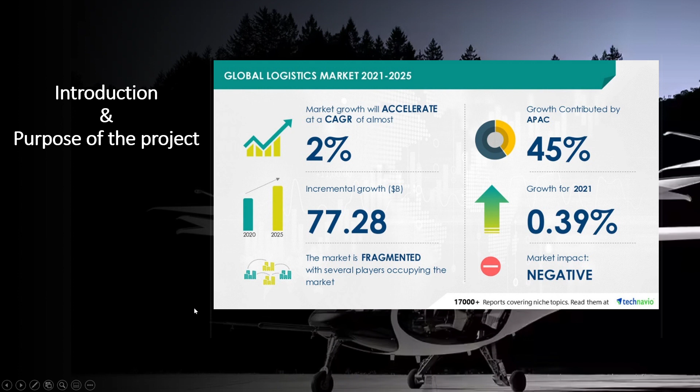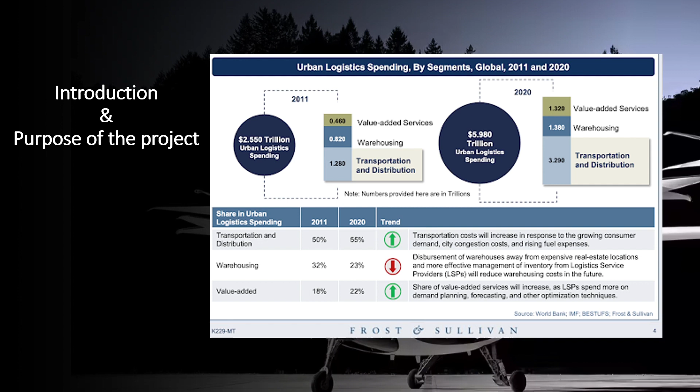The second reason why I chose this project is that Uber's ecosystem already has an advantage for developing this project. It has a good brand image with available shipping service. In addition to the high density of Vertiport networks available, this project will expand the company's service ecosystem as well as make the most of available resources to be profitable for a long time in the future. So the need for fast urban delivery for Uber is clear.

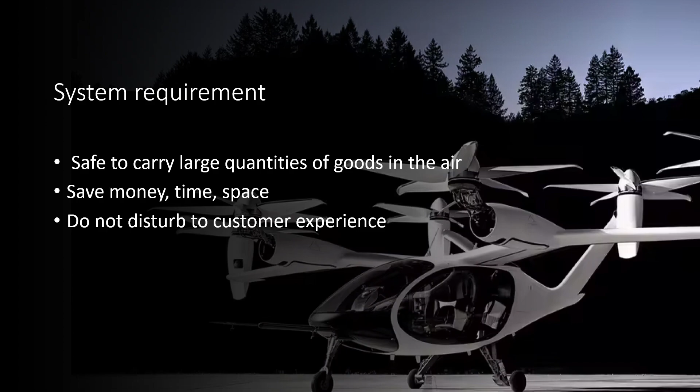I will move on to the system requirements. Like other shipping industry products, safety and low cost are the minimum requirements. It also needs to be able to hold the payload of the package. In addition, a fundamental element for this project is that goods transportation is by aircraft and the Vertiport is built on top of tall buildings. Therefore, an important requirement is that the system needs to save a lot of time and space, as well as avoid disturbing customers. Next, I'll talk about the design.

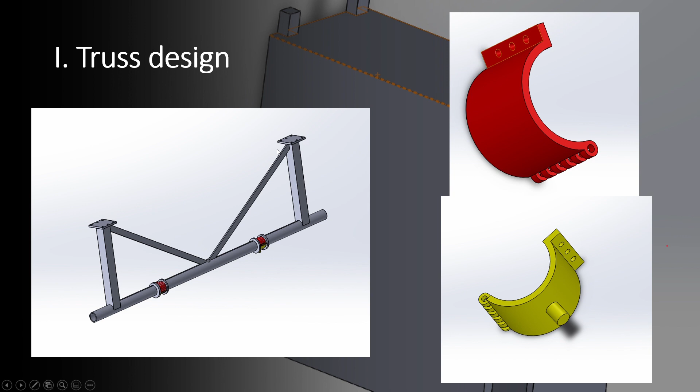As the requirements are clear, I will talk about the design of the truss system and a cargo box. The truss system has two parts, the front part and the back part. What you look at right here is the back part. We can link the truss into the belly of the aircraft by screw and drive. And this part right here is a representation of a hook, which we'll use to link into the cargo box, which I will present later.

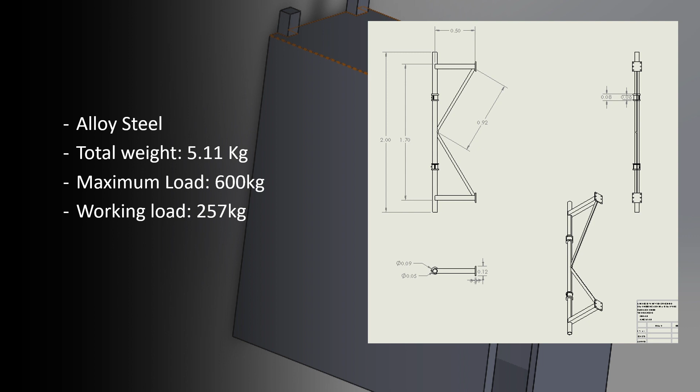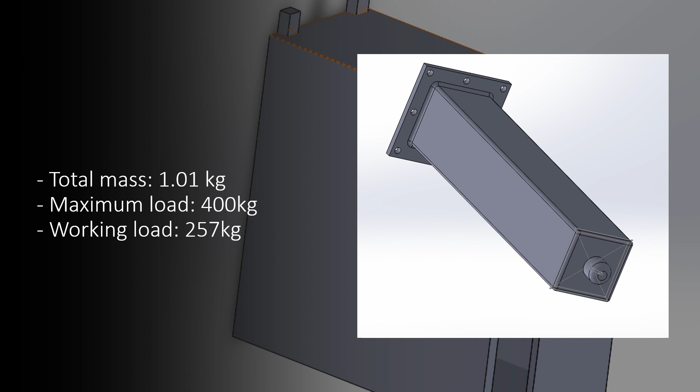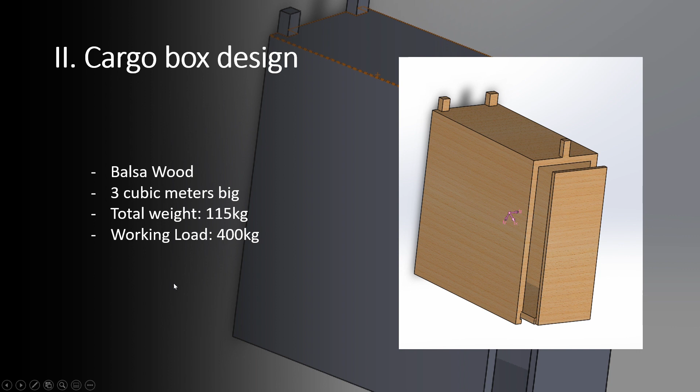In summary, the total weight of the box and the truss system is 121 kilograms. It can carry about 400 kilograms of products inside the box, and the truss itself costs about $3, including the material and the manufacturing. The wood box also costs about $100.

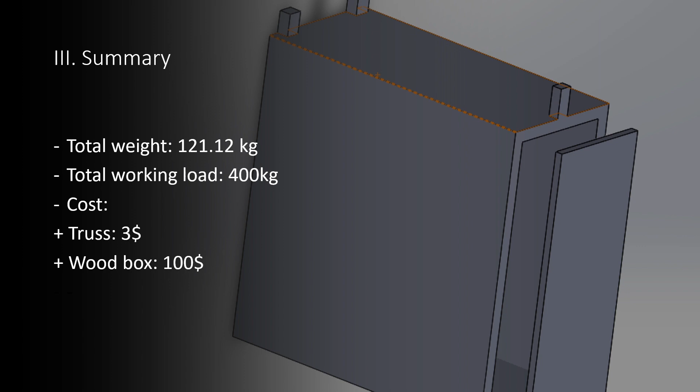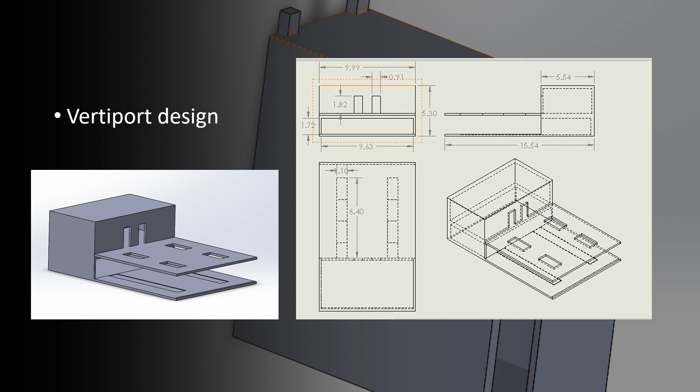This right here is the Vertiport design. The Vertiport has 2 floors. The upper floor is the floor for aircraft preparations and for passengers to board. There are holes between the 2 floors so that when the aircraft is landing vertically, the package can pass through the holes into the lower floor. The lower floor will have a box rack for unloading packages. This vertical system not only saves time and space, but also takes advantage of the condition of high-rise buildings.

Next is the operation cycle. The cycle begins when the aircraft starts to land vertically, while the box under the aircraft, loaded with 400 kilograms of products, is passing through the holes. When the aircraft wheel hits the ground, the box is supported by the supporting table.

The support table will slide the bottom of the box out along with the goods in the box, and then automatically drive into the warehouse, where there are staff ready to unpack and load new items onto the supporting table, and the table automatically returns the new items into the box.

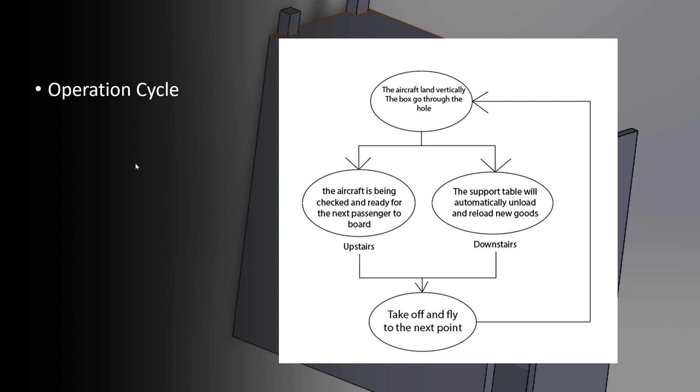Meanwhile, upstairs, the aircraft is being checked and ready for new passengers to board. The aircraft takes off carrying passengers and cargo to the next point, where a new cycle begins.

Here I have done some quick evaluations of the system. This is a small comparison between the truss and cargo box system and the normal van. The truss and cargo box system has a loading ability of 400 kilograms and 3 cubic meters, while the normal van can carry about 650 kilograms along with 5.5 cubic meters.

The travel time from Marina to downtown, calculated by the Uber company themselves, is about 15 minutes with the aircraft and 1 hour 40 minutes with a normal car. And finally, the loading time is my conjecture.

The truss and cargo box needs about 30 minutes to unload and load new items, whilst a traditional van needs about 1 hour and 30 minutes. As can be seen from the table above, it proves itself to be an efficient, fast delivery method, although a little less in volume each time.

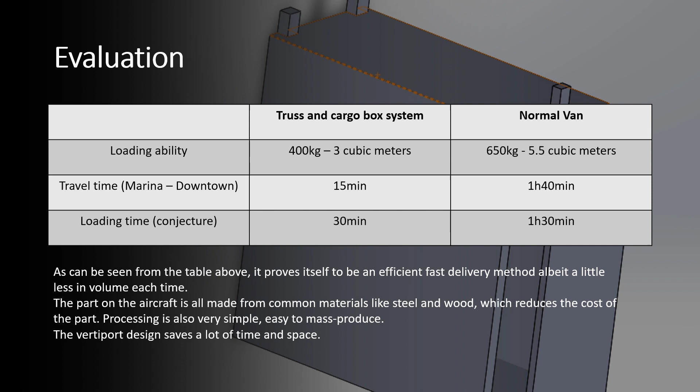Finally, I will talk a bit about the future works. An innovation project like this takes about 1 to 4 years to complete. So after nearly a month of research, it is clear that there is a lot of work to do. First, I think we need to study more closely the needs of the markets as well as the requirements of potential Uber partners in the future if this project goes commercial.

In the design section, we need more tools to test and evaluate the effectiveness of the design as well as mass production and the costs. The simulation and evaluation should be done to say whether the safety standards are met. We should also not forget the artistic aspect of the products.

In particular, the vertiport design also needs more research on construction technologies on high-rise buildings as well as the effectiveness of the design. Because as I know, not every building can be modified to build this vertiport. Finally, we need simulations and detailed methods of evaluating the performance of the entire working cycle.